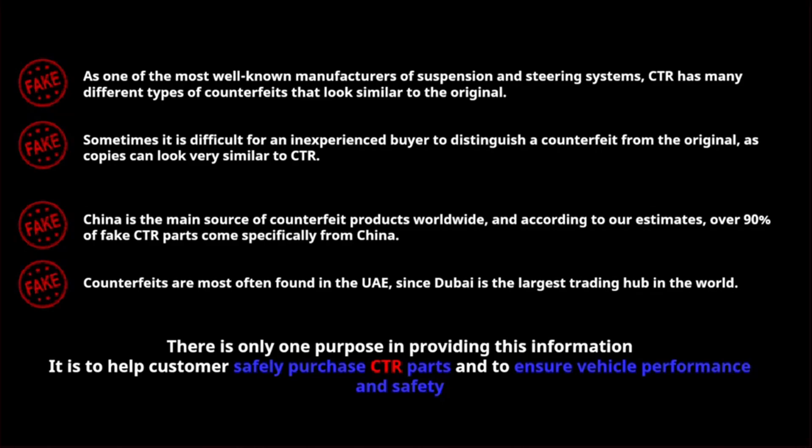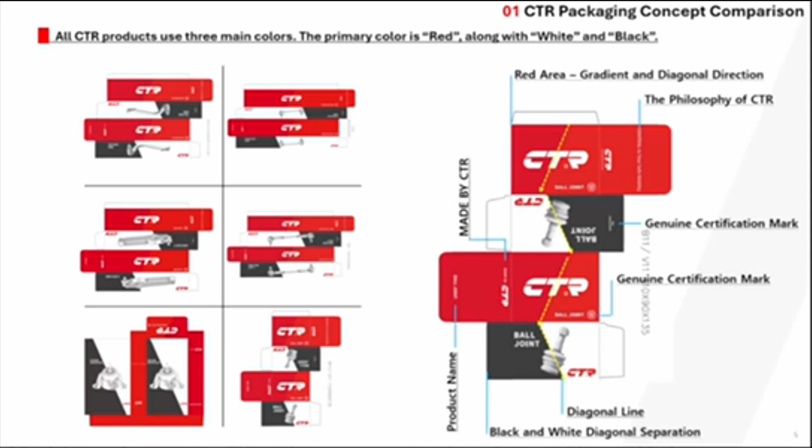This slide gives a detailed look at key elements of our new CTR packaging concept. On the left, you can see how the design is applied consistently across different product types. On the right, we highlighted specific design features that make the new package distinctive and recognizable. For example, we use a bold red area with a diagonal gradient, which gives the package a strong visual identifier. The phrase 'central to your safe mobility' reflects CTR's philosophy and commitment to safety. You also find a clear genuine certification mark, the product name, and a diagonal black and white section that make the part type instantly recognizable. All of these elements work together to strengthen brand recognition and help prevent counterfeiting.

Now let's take a closer look at the key design elements of CTR's package layout. First, the red area features a gradient effect, getting darker from left to right, which gives a sense of depth and motion. Second, a diagonal line runs from the top left to bottom right, dividing the space dynamically, creating a modern and premium look. Third, the phrase 'central to your safe mobility' is printed to emphasize CTR's core philosophy, placing customer safety at the center of everything we do. Fourth, the black and white diagonal separation continues on the bottom panel, helping to organize visual information clearly.

Fifth, the code B11 identifies the box type and version. The dimensions 110 by 90 by 135mm refer to width, depth, and height. Sixth, the CTR logo is printed with clean, consistent lines, and the label 'made by CTR' is always placed in the same spot for brand consistency. Seventh, on the underside flap, 'ball joint' is printed in bold capital letters, allowing for quick product identification even when boxes are stacked.

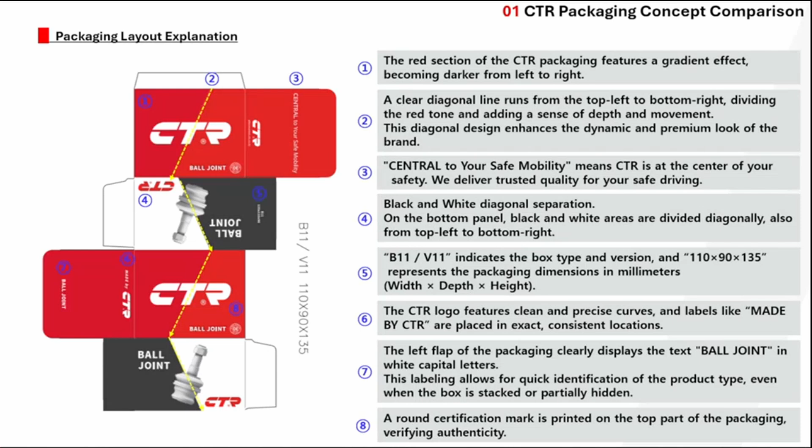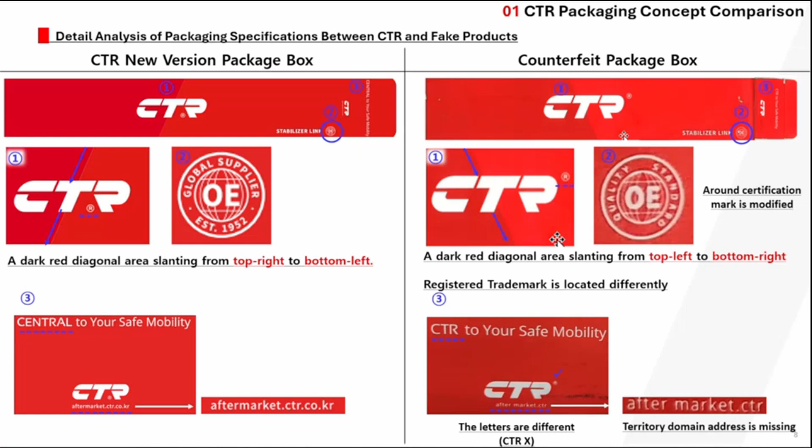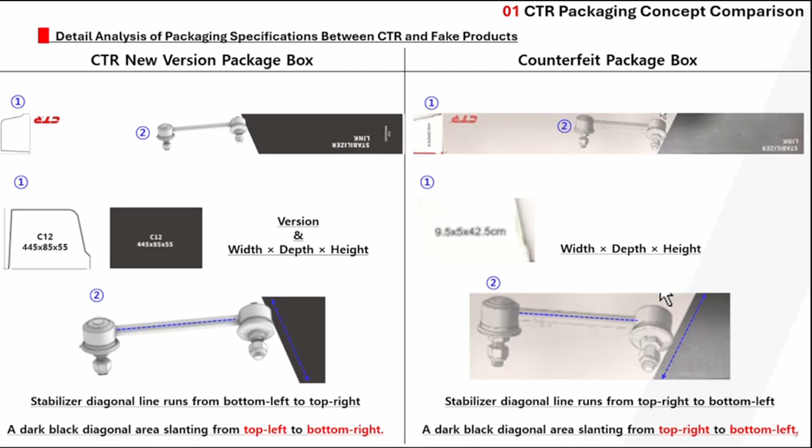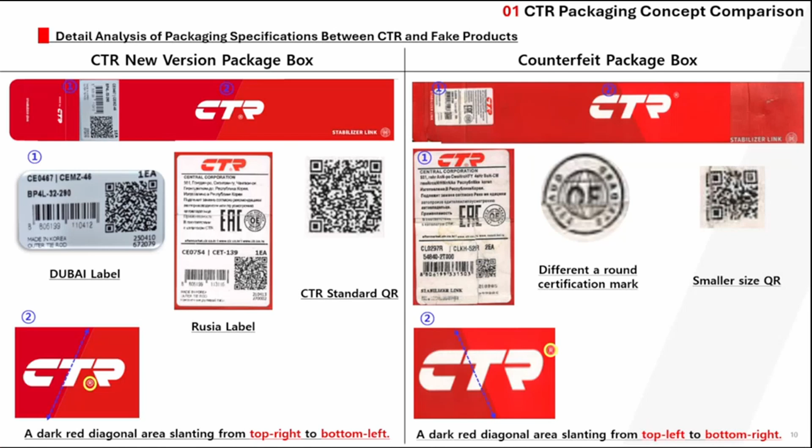Recognizing these differences is key to ensuring authenticity, customer trust, and product safety.

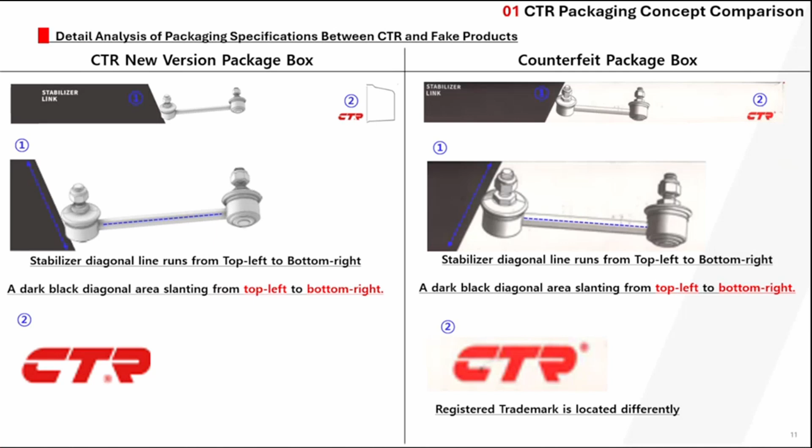Being familiar with this kind of packaging lets you quickly recognize the fake item before they reach the customer or enter the market.

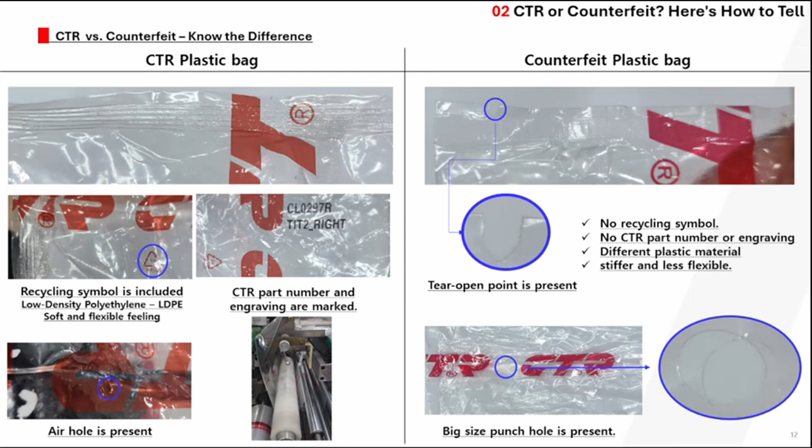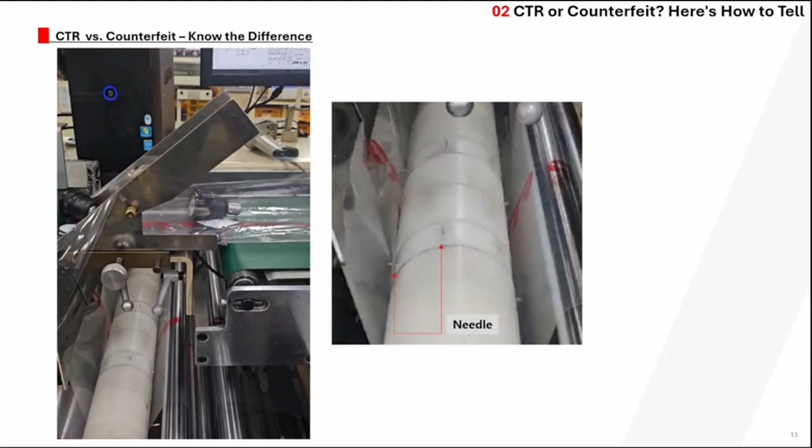This video is a CTR vinyl packing process. Let's enjoy.

In this slide, we summarize some of the anti-counterfeit and identification measures applied to CTR products like the outer tie rod and ball joint. First, we will improve the lot number management system. Previously, it used a 3-digit format based on year, month, and day. Now we've upgraded to a 4-digit format that includes a new serial code for better traceability.

Yeongsan plant used the alphabetic code. VINA plant used the numeric codes.

Second, we will add the BOM information on the sealing plastic. This means that along with the CTR part number, the production BOM and installation direction are now also printed directly on the packaging. This enhances product tracking and prevents tampering or part swapping.

And lastly, for extra authenticity, the phrase 'Central to your safe mobility' is now printed on the inside joint area. This is a subtle but effective feature that counterfeiters often miss.

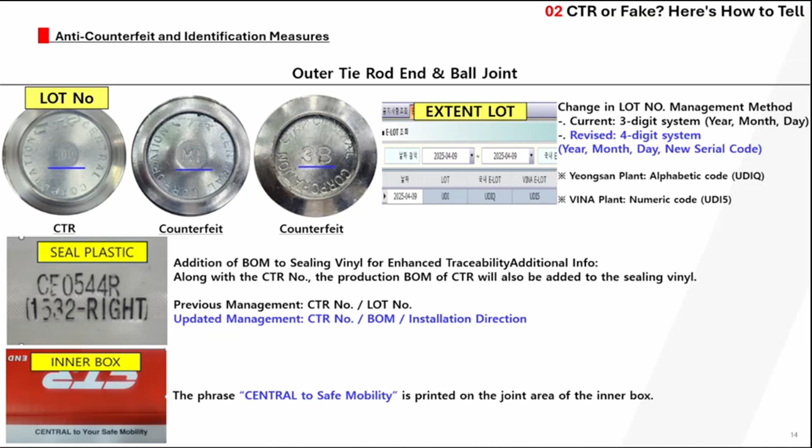This slide outlines the anti-counterfeit measures basically applied to the tie rod. First, we will update the lot number system. Previously, we used a digit format for year, month, and day. Now we will move to a 4-digit system that adds a new serial code, making the traceability even more precise.

Yeongsan plant uses the alphabetic serial codes. VINA plant uses a numeric code. You can see in the photo how the lot number, and the part number, are now clearly engraved directly on the part.

This enhanced format helps prevent counterfeiting and allows us to trace products more accurately throughout the supply chain.

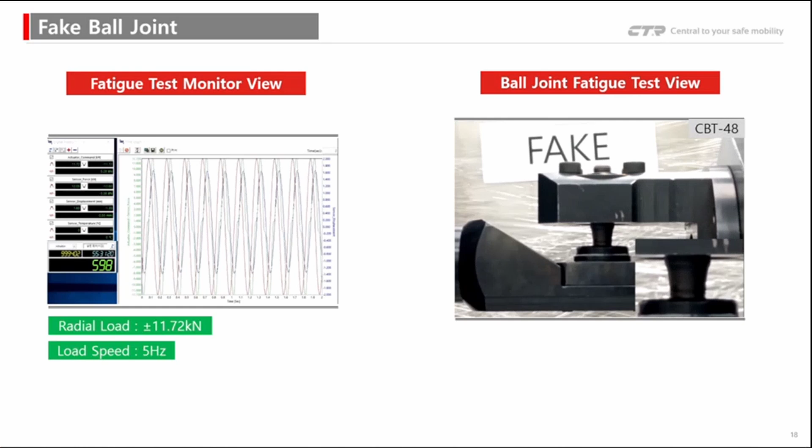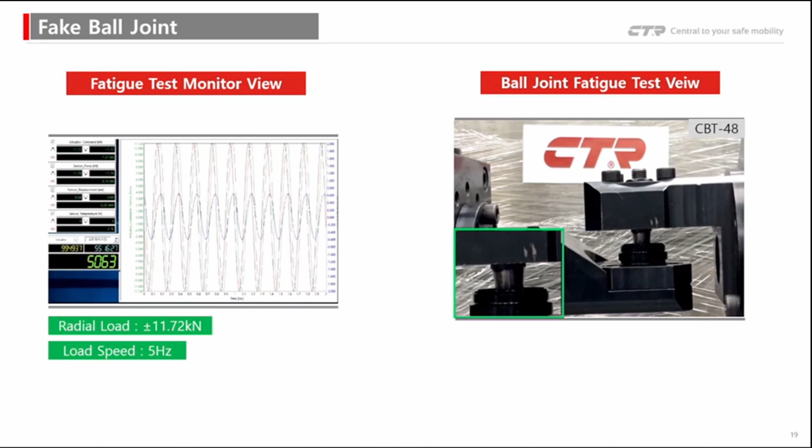As shown in the results, the fake product failed early in the test cycle and showed clear signs of structural weakness. In contrast, the CTR genuine product withstood the same load conditions without failure, demonstrating its durability and quality consistency. The video footage in the next slide shows both the test procedure and the actual failure of the fake product. This test clearly shows the danger of using counterfeit parts. Even though they may look similar from the outside, their internal strength and reliability are far inferior. We share this data with you to help you protect your customers from risk and to emphasize the importance of choosing genuine CTR parts.

This slide shows what happened to the fake ball joint after the fatigue test. On the left, you can see that the part is damaged and worn, showing poor durability. On the right, we can see inside the metal structure. The grain flow is not smooth and is broken. This means the part is weak and may break during driving. These are serious risks that customers cannot see from the outside. That's why we check the inside details carefully.

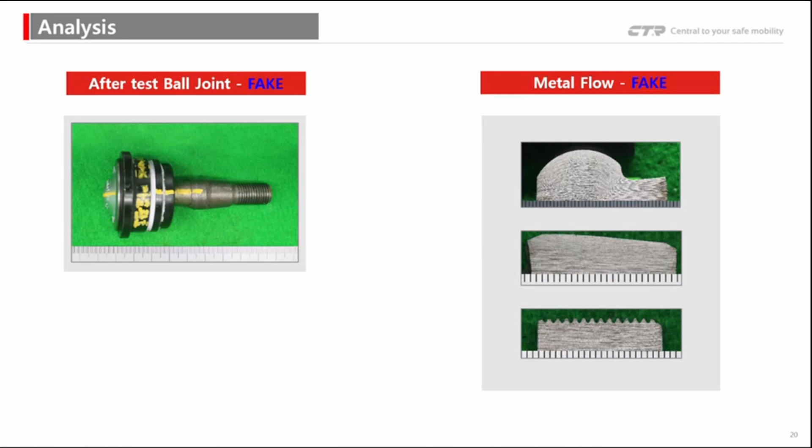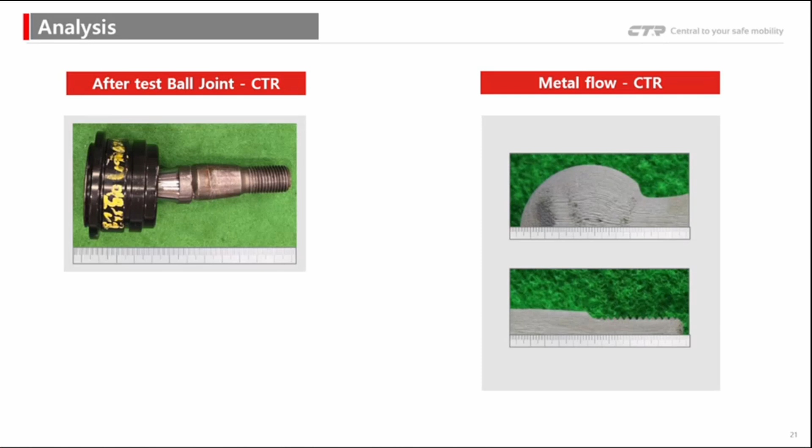Now let's look at how the CTR genuine parts perform. On the left, you can see the part after the fatigue test; it is still in good condition with no damage. On the right, you can see the metal flow inside the part. The lines are smooth and continuous, showing strong metal material strength. This means the CTR products are durable, reliable, and safe. This is a quality difference that makes CTR stand out.

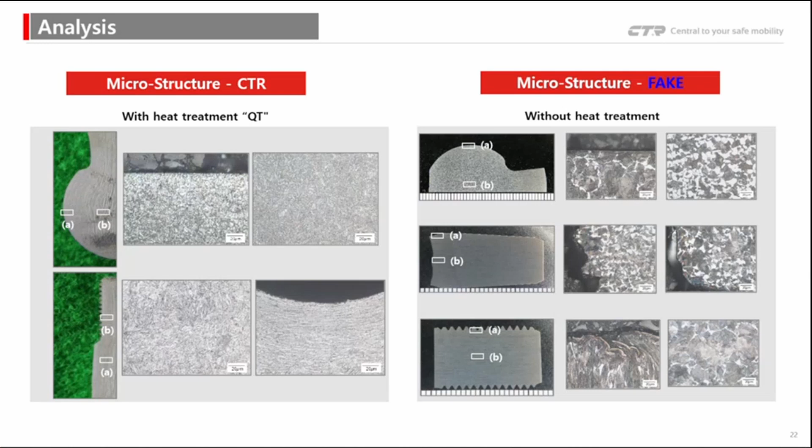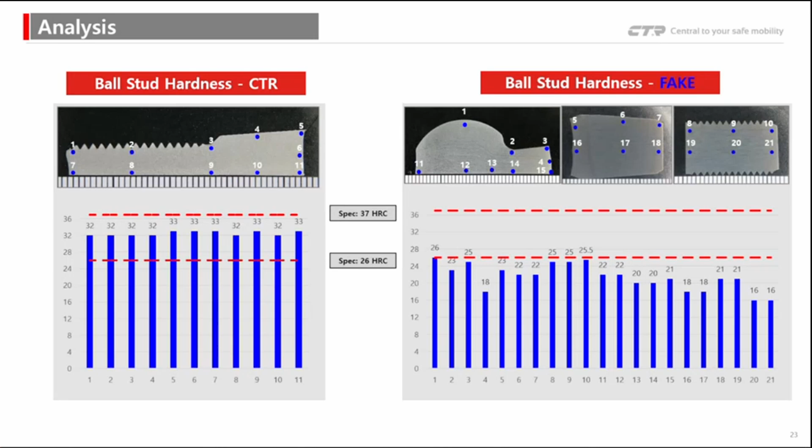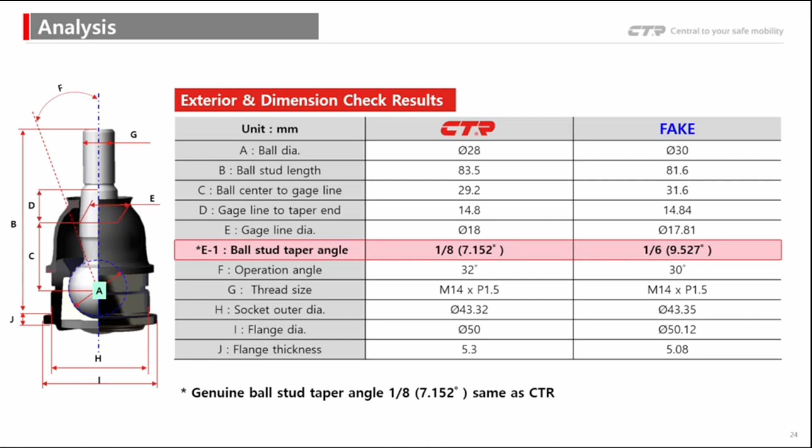CTR directly follows the global OE standard, while fake parts often ignore them.

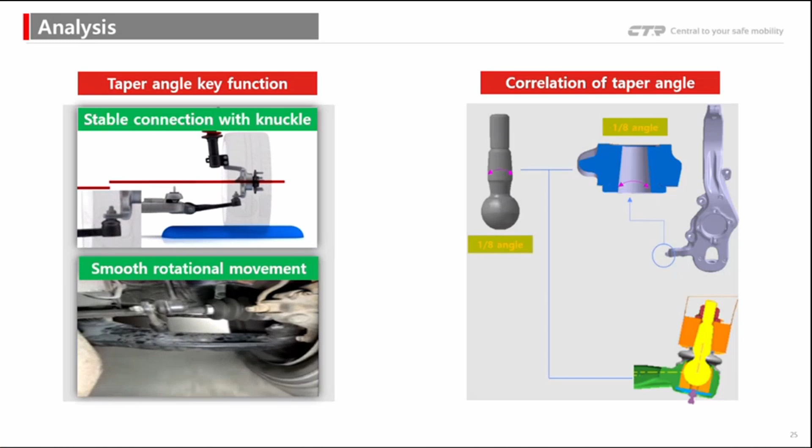On the right, we show a diagram that illustrates the perfect alignment between the CTR 1/8 taper stud and the matching knuckle seat. Using a non-standard taper may lead to misalignment, loose fitting, or even joint failure, especially under dynamic driving conditions.

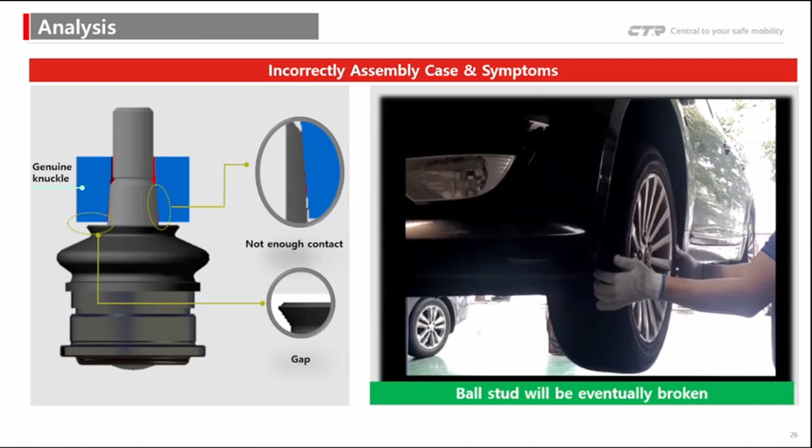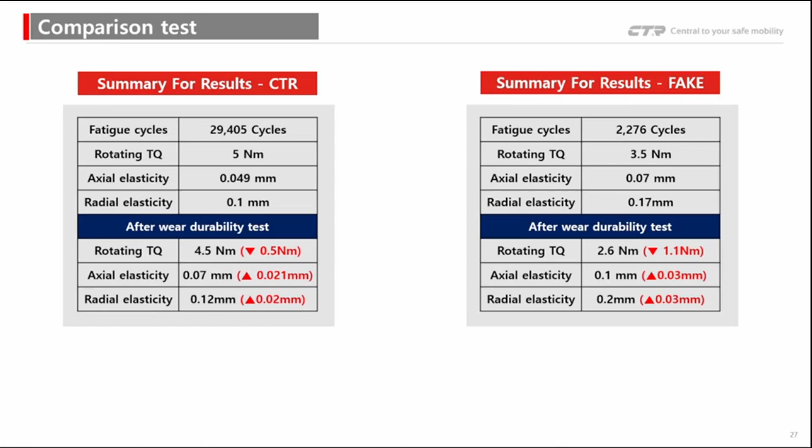In conclusion, we have shared a comprehensive comparison between CTR genuine products and counterfeit alternatives, both in terms of packaging identification and performance evaluation. Our findings clearly demonstrate that counterfeit products fail to meet quality and safety standards, which can lead to serious performance issues.